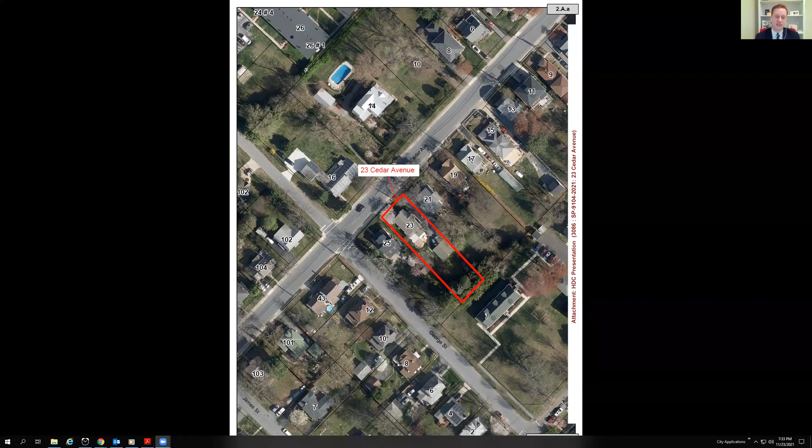So joining us to present the plans are Mike Kavanaugh, and as well we have, I don't know if they're all here, Mary Huntsberry, Jeremy Carbaugh, and Sidel Kavanaugh. Mike, the plans are yours.

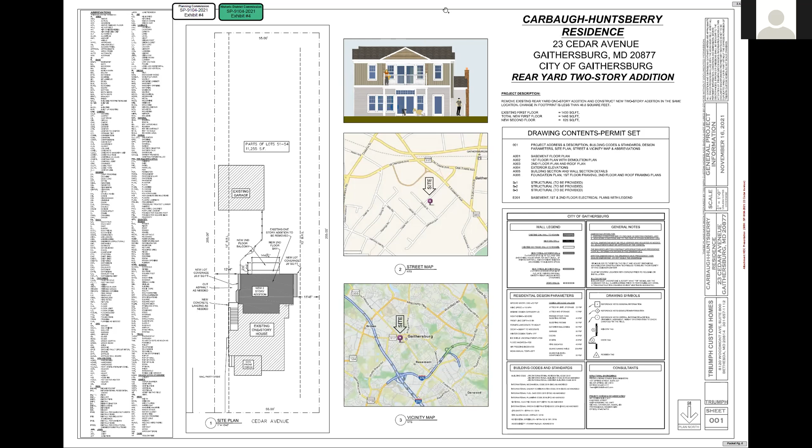Mike, you're on mute. Mute. Think I got it that time. Good. Now, were you able to put on your video? Share my screen. If you can tell me how to do it with Teams, or on Zoom, I can do it. Well, there you go, down at the bottom left, there should be Start my video. Two items: one is for video, one is for audio. Start video. Okay, I see it. All right, so what do I select? I'm sorry, well, if it's at the bottom left, if it doesn't have a slash through it, or if it does have a slash through it, click on the video.

Okay. Up. There you go. You're in. Oh, we lost you again. There you go. Okay. Very good.

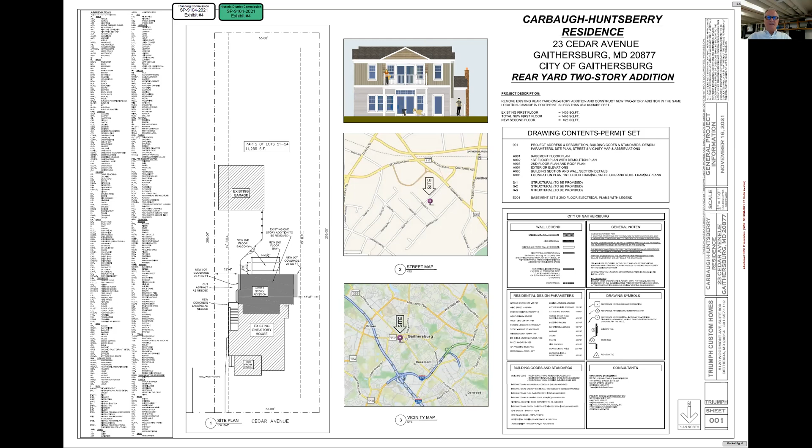If we go to the next page, or the pages where the elevations are showing, I can either explain it in plan, but I think I'd rather show it in elevation. So if you could keep flipping through until the side driveway elevation shows up, that would be good. Keep going please, yeah, this helps.

That stair tower didn't necessarily always go down to where we now propose it goes, to the existing basement level. The existing basement stairs are very narrow and steep, obviously not code conforming, and they've been treacherous for them to use over the years. So we've decided to connect the new addition through a new stairway into the basement. That's what this scheme provides—it gets rid of the dangerous stairs and gives us a nice set of stairs down as well as a nice set of stairs up.

So that's how the interior kind of came about. The shape and massing of the addition takes a lot of its clues from the roof slopes and gables that are already part of the original house, the bungalow cottage type style, I guess you might call it. I just manipulated them in different places to try to make sense of how to put them together in somewhat of a pleasing, balanced, symmetrical scheme.

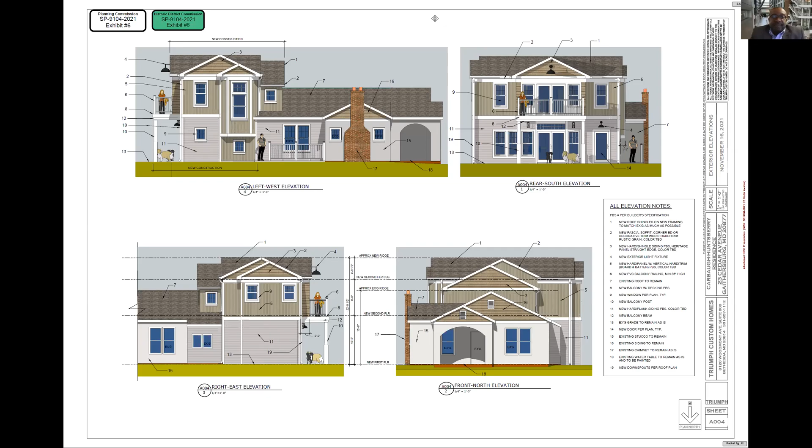Okay, thank you. Commissioner Roddy? Yes, I agree with my colleague's assessment, so I won't belabor the point.

I think it can be tricky trying to make a 2,000 square foot addition under these circumstances to fit the neighborhood, but I think you're to be commended in how you matched the roofing lines, the textures, the materials and the colors. I think you've done a very nice job. Thank you very much.

Wonderful. It doesn't sound like there's anything further anybody needs to add. This is a courtesy review, so there's no vote. Good luck to you guys, and hope you enjoy your new addition.

Very good, awesome - we'll get Mike to put that window in the shower. We think it's a great idea.

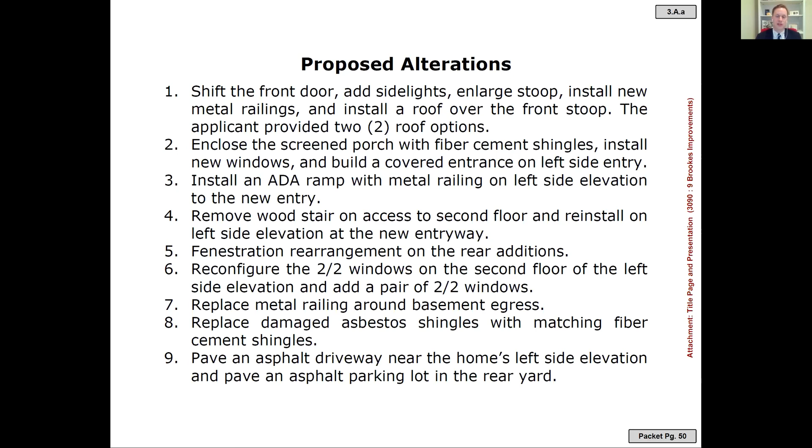And we have drone footage of the property to orient you, which we'd now like to play. Tech team, if you can pull that up.

And here's a view from the front. Tech team, if we can go to the packet, page 51, please.

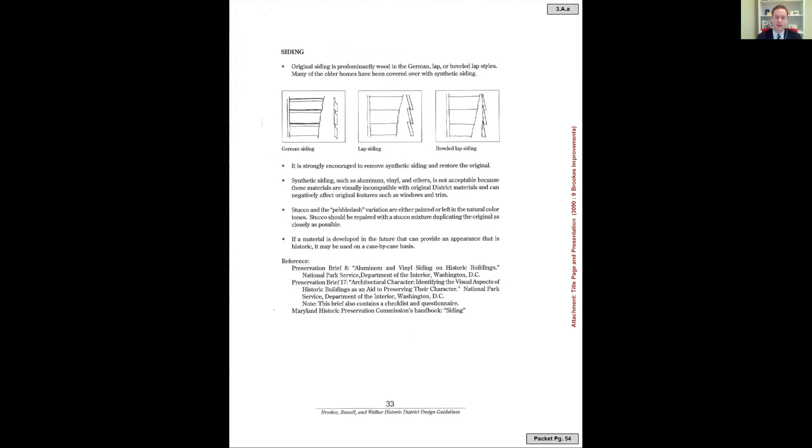And next page, please. We can skip this one. Let's go to page 56, the next page. For doors and storm doors, it begins with: homeowners are encouraged to consider the style and character of the house when planning changes to the front and storm doors. Front doors are of wood, some with elegant carved ornamentation and others with simple wood panels. Transoms and side lights are common accompanying features. Glass panes in the doors range from simple to ornate, single to multiple.

And the first bullet reads: any doors visible from the street should be of wood and in the style of the house. Original wooden doors are worth rehabilitating.

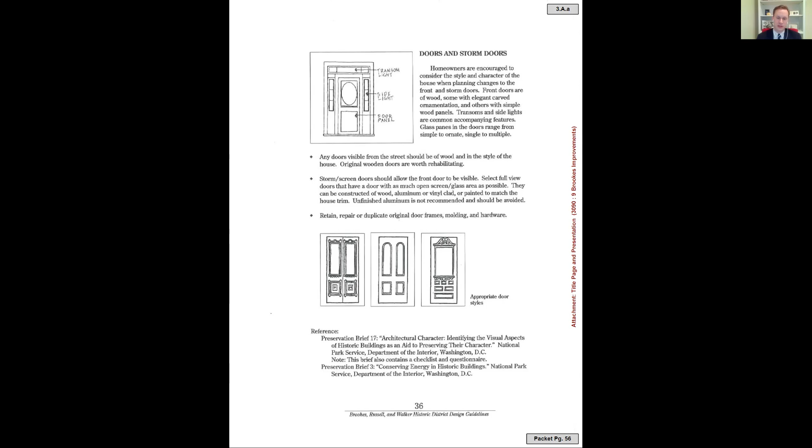Next page, please. For windows and storm windows, basically, the guidelines recommend to retain original windows.

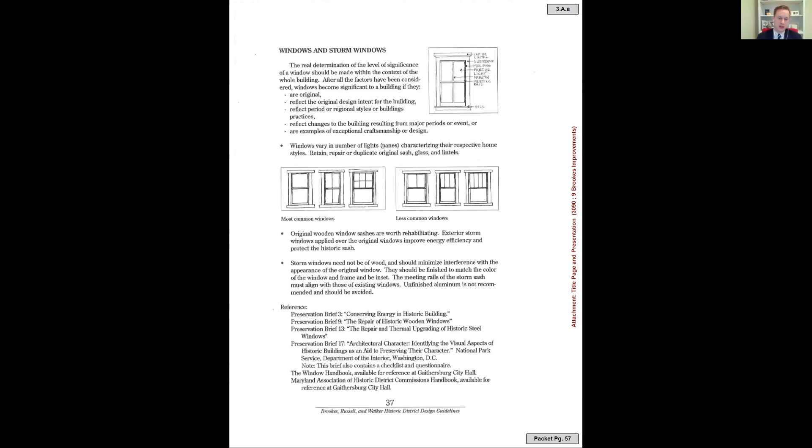And next page, please. For signage, at the bottom of the page, this will come into play when any signs are placed at the entrance and exit of the driveway, but we don't have those details yet. So that's one of the conditions staff recommends.

Next page, please. Finally, under new construction and under additions, new work must harmonize with the character and scale of the existing house. The new work shall be differentiated from the old. It shall be compatible in height, scale, materials, elevations, texture, color, and details.

And now if we can jump all the way to page 83. We can go to packet page 83. These are the plans, and I will turn it over to the architect, Luis Moya. Luis, if you are ready, the plans are on the screen.

Oh my God. Luis, are you able to put on your video? I am here. Good evening. Welcome to you. Are you able to put on your video? One moment, what happened? There we are. Wonderful, we see you. Welcome to you.

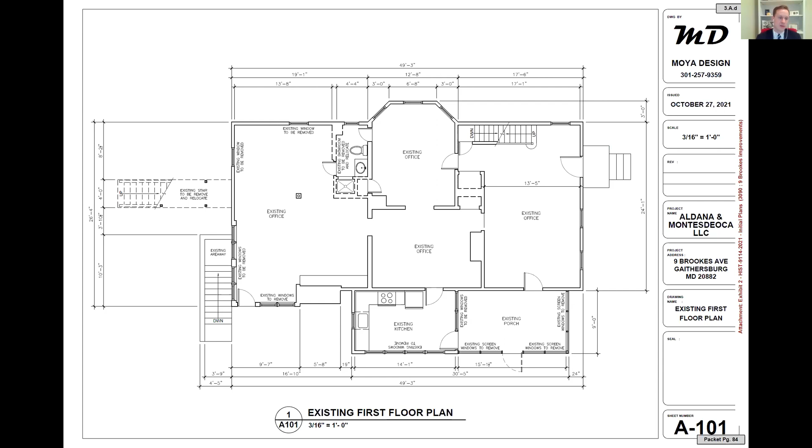So this is a floor plan. The major change here - this is the existing floor plan. Again, you see the stairs at the rear of the residence, so those will be removed. There's already a porch on the left side elevation that's going to be enclosed.

Next page, please. And this is the second floor. You see it's currently, or previously was, used as an office. It'll be still used as an office, just needs some refurbishment.

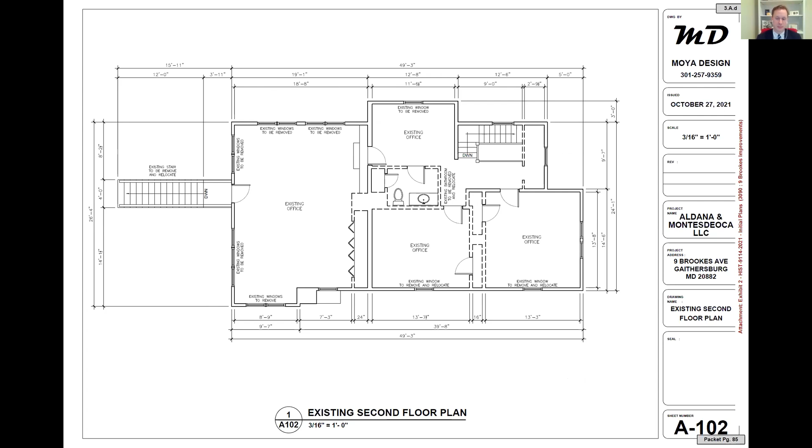Next page, please. And here's the basement floor plan. Next page, please.

So this is the existing front elevation. You can see the simple entryway. There's basically a triangular shaped pediment over the front door. One of the goals of the project is to shift that doorway over so that it's more aligned with that second floor window that's above it.

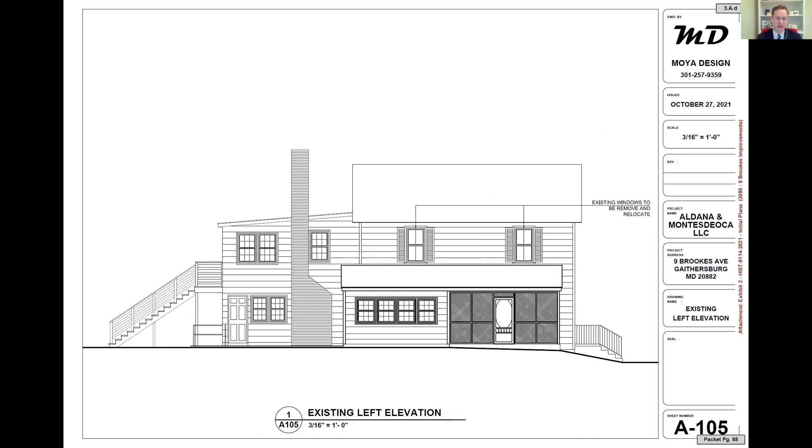And you can see there's a screened in porch on the left side elevation. Here's that screen porch on the left side elevation. This is the right side elevation. And here's the rear elevation.

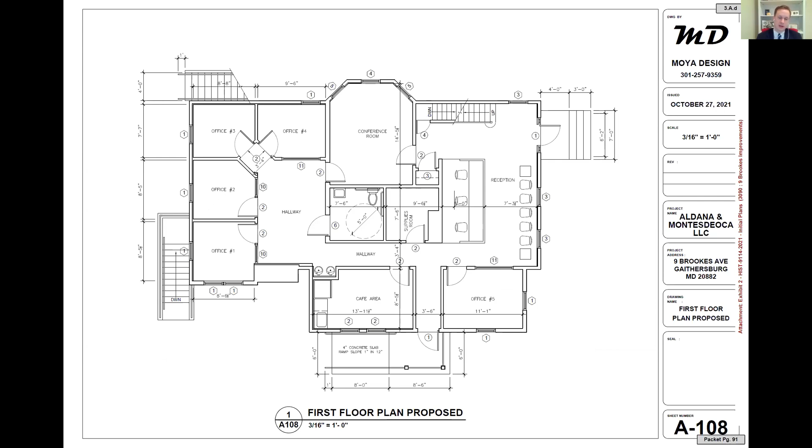So this is the proposed floor plan. As you can see, the current screened in porch area will be office space. And more office space upstairs. This is the window details.

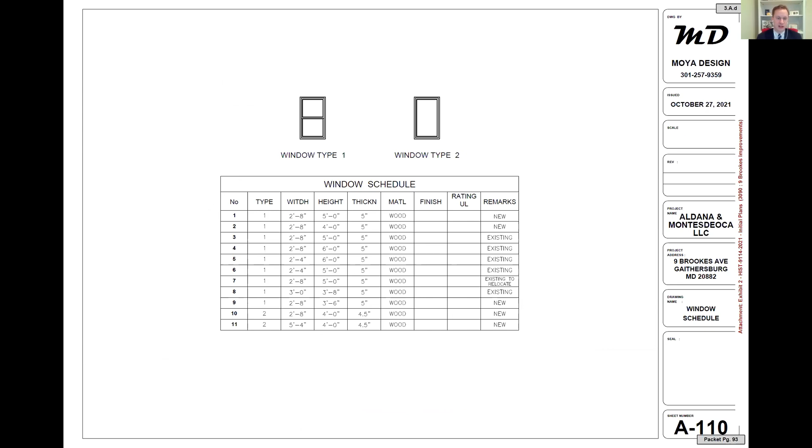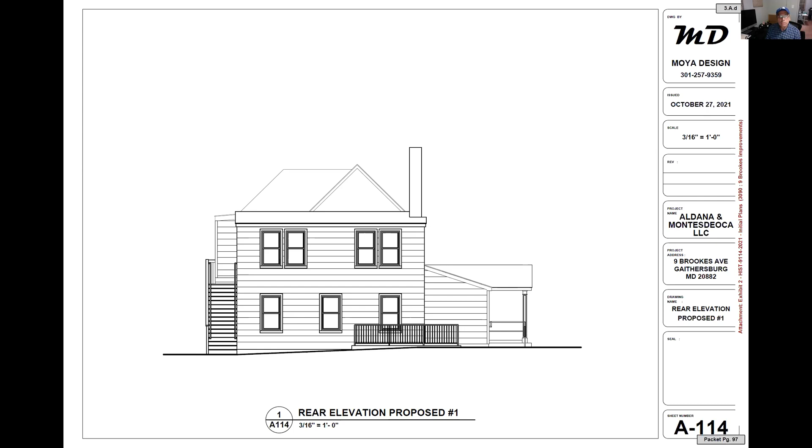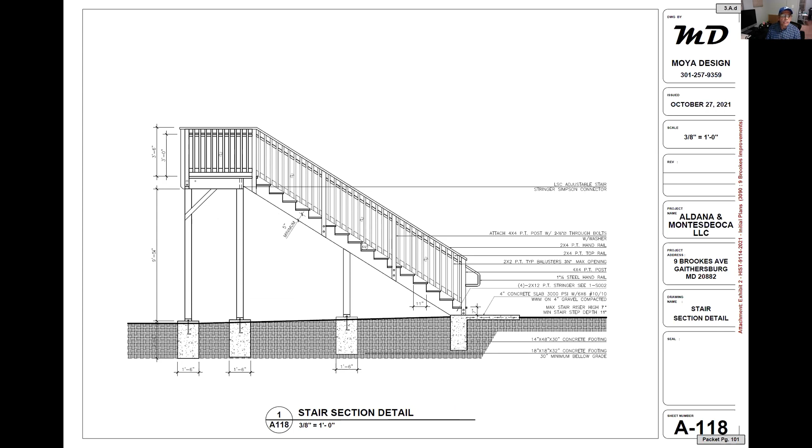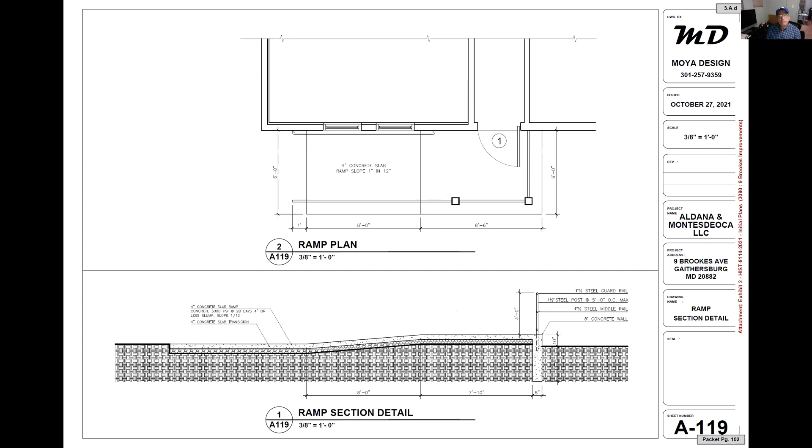Next slide please. Detail for the stair, showing materials. Next slide please. This is the concrete ramp entrance, construction detail. Next slide please. And this is the pictures.

That's it. Oh, Chris. Yep, that's all. That's the presentation. Okay, thank you.

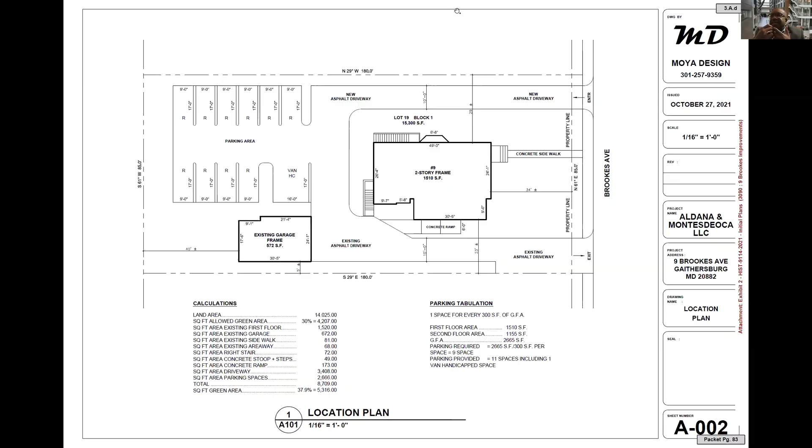Great. Yeah, I'm just observing, it's lack of detail, that's my concern. And we have a recommended condition of approval with this plan in front of you now, to request additional information before we approve the plan.

All right, I think it's two separate things though. There's the permitting side from a zoning standpoint, whether you're meeting the requirements, Greg. And then there's whether putting in this parking changes the entire character of the existing historic structure. That's kind of more our purview.

Okay, Rudy, any more before I go into John? No, I think I said enough. These are all good points, and I think we have to consider them at the end. So next is Commissioner Roddy.

Once again, I'm very much in agreement with my colleagues, particularly with regard to the optics of the parking and the practicality of it. I won't belabor the point. I have looked at the proposed staff recommendation and the five conditions that it contains, and I am in agreement.

Okay, I'm next and last. I like the revised stairs being changed. The rear exterior stairs that stick out like a sore thumb is being changed to the side elevation, which is so much better both visually and physically. It will tend to be protected a bit by the building itself, just a bit, from snow and some rain, more than where it is now. So visually, it's a much better improvement where you now have it. I think it's wonderful.

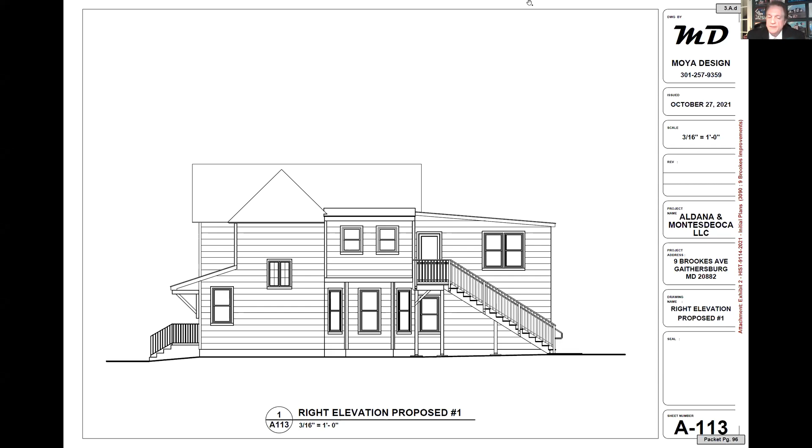I think all of the changes you're proposing are compatible with the existing building for the most part. I do agree with Commissioner Feinstein that the covered portion of the handicap ramp looks a little bit foreign. I don't know what page that is. If you can go to the proposed left side elevation, let me find the page number. It is packet page 95.

Yeah, it just looks a little bit foreign to the rest of the building. You have the columns, which you don't have anywhere else. Then you have the pediment structure, which in this view is just two-dimensional. It looks like a pediment, but from the side elevation or front elevation, seeing it from the side, it does look long. I'm not majorly concerned about it, I can live with it either way. If the commission votes to ask for it to be removed, I will support that. So I don't care about that.

Can we go to page 98, which is the front proposal 2? I like this front elevation better, at the front door, the pediment over that, which tends, in my mind, if we're going to keep the pediment over the ramp on the left-hand side, it then works with the vocabulary for the front elevation. So that's my thought. What I'd like to do is ask the commission's opinion on these items, because I think there's actually 3. Let's hit those 3: first is the pediment over the ADA ramp, second is the front elevation pediment.

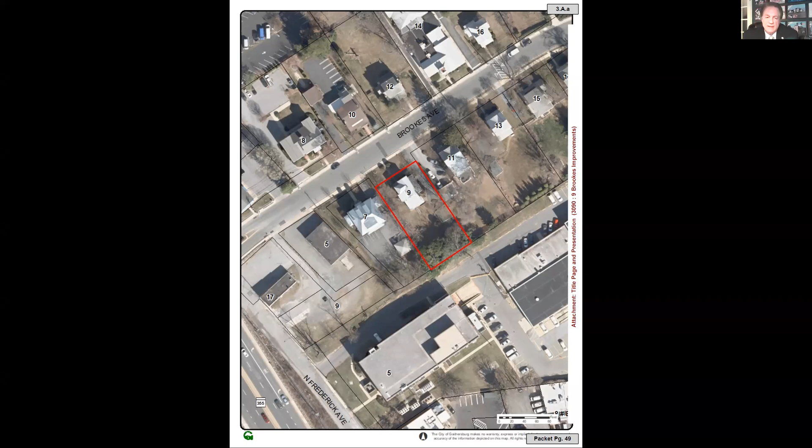If we can go back to the aerial again, my thoughts are - I don't want to, packet page 49, I'm hesitant to guide you guys towards my thoughts, but I'm concerned that by putting in a requirement for a paver, we are actually... it was the other photo, kind of like the drone photo that showed the commercial building in the background. Let's see, is that the one that was just up? There you go, thank you.

My point is that if you look at the right-hand part of the picture, that house is commercial. Okay, I see that. Yeah, here's the thing, there's two thoughts in my mind. One is that's already done for commercial right next door. So none of us want to lose grass for paving, but are we putting a burden on this business where there isn't one right next door?

But the other thought for me is, if you look at all of the houses, they all have asphalt paving in their driveways. So are we putting a burden on somebody to alleviate our feeling on the loss of grass, but putting in something that's actually foreign to the neighborhood because nobody has pavers on their driveway? So that's my big concern on that.

But anyway, there you go - see, look at all the driveways. So we're saying that we want to change one, make it paver to make it better, and I don't think that's going to be better. I think it's going to be just as massive a non-grassy area, whether it's brick or not. That's my own thought. Yeah.

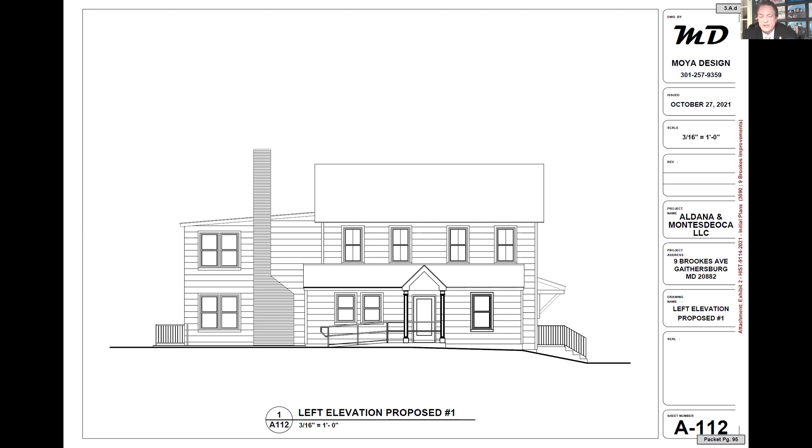So if we're looking at, you can go back to page 98, please. If we're looking at the front elevation with that pediment and that soft pitch, which looks like it might be a 4-12, maybe 5-12 at the most, I would think that those two pitches should be the same. Those two brackets should be the same.

What are your thoughts? Actually, now that I'm thinking about it, the brackets may not work on the left side elevation because they'll actually physically block the path. So I take that back, and my suggestion is to keep proposal number 2 elevation, front elevation over the door, and then match the detail and the slope for the covering.

Does anybody have a concern on that? How is it supported? Yeah, you have to have columns because I think the brackets would physically block the path.

The ramp, yeah. So how is it supported? I take it back to having brackets on the ramp. I think we'd have to go with the columns if we're going to do a roof. So right now for the pediment, we have 2 against the roof and 2 for the roof, which is a tie.

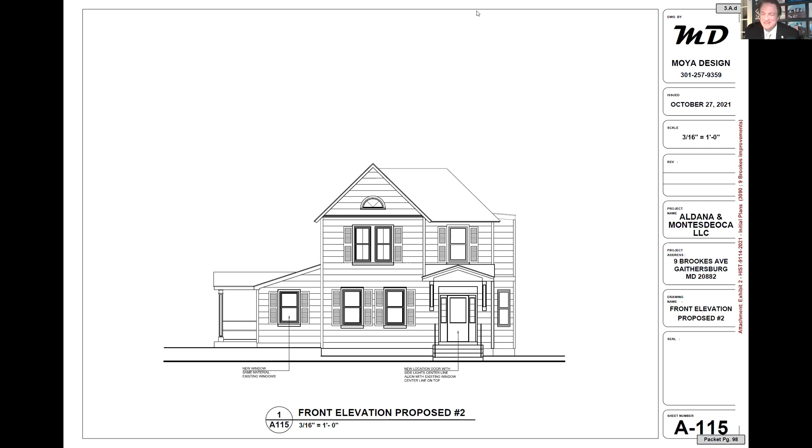So does anybody want to change the vote? Because I'm fine either way, it's not a big issue for me. Does somebody feel strongly to take the roof off, or strongly to keep the roof?

I mean, architecturally, I like the building without it. However, I'm sensitive to the fact that it'll be beneficial to someone in a wheelchair to have a covering as they try to enter the building. So from an ADA standpoint, I think it'll be better to have that.

Okay, Rudy, you think so as well? Yes, I concur. Okay, all right, so that changes both your vote and Mark's vote. All right, so the roof stays for the ADA pediment, but am I railroading everybody into the front elevations option 2? I don't want to railroad everybody.

Do you guys agree? Well, John was the one I think who had the strong opinion for option 1. Okay, so he had that, all right, and then everybody else, I'm strong on the pediment, and you guys were either way. So again, we have a split tie.

Does anybody want to change their vote? Right now, Mark, you're either way. Do you have a preference? You originally said shed. Do you want to go back to shed?

Well, I think the language changes a little bit if we're keeping the entrance over the top of the ramp, because it does have a pediment no matter what, since we do want to have a gable end. So with that in mind, I do like the shed better than having the gable at the entry. However, because we're introducing the cover to the ramp, I think option 2 works better as a composition.